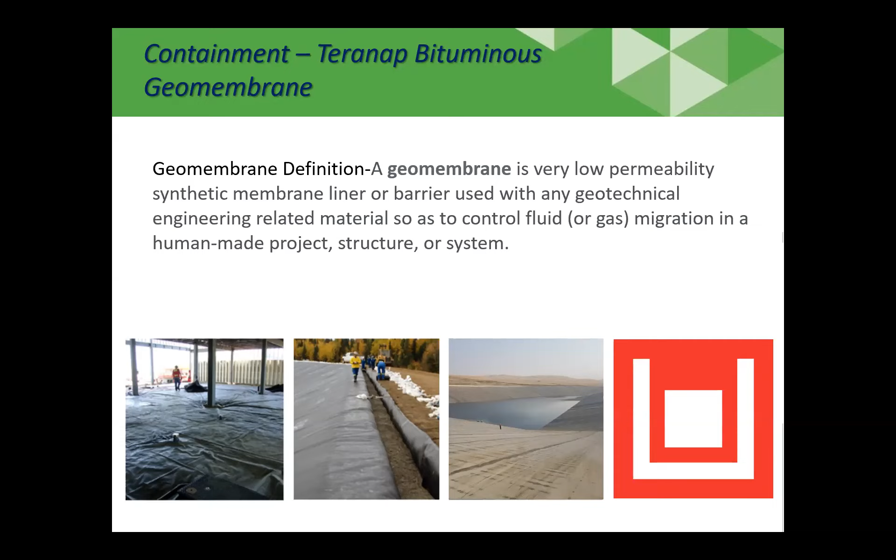Lastly, what we'll mention, and we'll go through this, Frederick will take us through this in detail, and he's going to share his screen for the technical part of this presentation. But when we consider the reasons that people are switching to BGM and specifically to TERANAP, there's really four reasons.

One is the conversion from conventional methods. The other is the cost effectiveness, whether it's from installation or whether it's from less maintenance and longer durability. It also goes hand in hand with a technical certainty. And then there are environmental benefits and construction efficiency.

The product is very easy to lay down and install compared to many of our other products. For many of the people that are joining us, as you know, dealing with the environmental conditions we have here, things like winter installation or wet installation, we believe that this product has a significant technical advantage versus a number of other incumbent products.

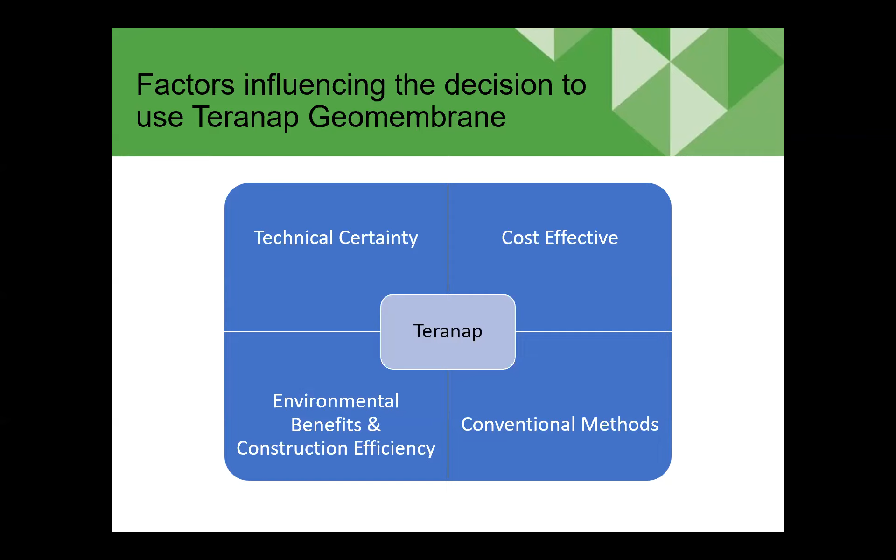So there's a couple of technical experts that you're going to hear much more about today. There are two. One is Frédéric de Martini, the Export Sales Development Manager for TERANAP. I had an opportunity to meet Frederick at their plant in France, and Frederick has traveled over to Canada a number of times, and he's got a personal connection to Canada as well. Frederick's got 20 years experience with TERANAP and has shown some very strong case studies to us around projects that they've done around the world, both converting to TERANAP as well as the longevity of the projects.

Second is Khaled Hosso, who is our operations manager for our installation services. Khaled comes with 19 years of construction experience and experience with all types of different geomembrane materials. Khaled is our most senior person that is on site managing our crews day in, day out, as well as our project management teams for NILEX. So this is the last part of the NILEX team where beyond going for the design and the supply, we go all the way to the installation.

Khaled will talk about some of the installation techniques of the BGM. So with that, Frederick, I'll ask you to share your screen and you can kick off your portion of the presentation, please.

Penelope, you want to start? Yes, okay, thank you. Hi everybody, I'm Penelope. I'm working with Frédéric at BMI in France. So I'm quickly introducing the group just for you to understand better the scope.

Please, Frédéric, the next slide. Just to give you some key figures about BMI: the number of square meters we sold, the fact that we have numerous manufacturing sites all over the world. We also have R&D facilities, and academies where we provide training. We are around 10,000 people, working in countries where we are properly established with headquarters, and also with many other countries through the export department.

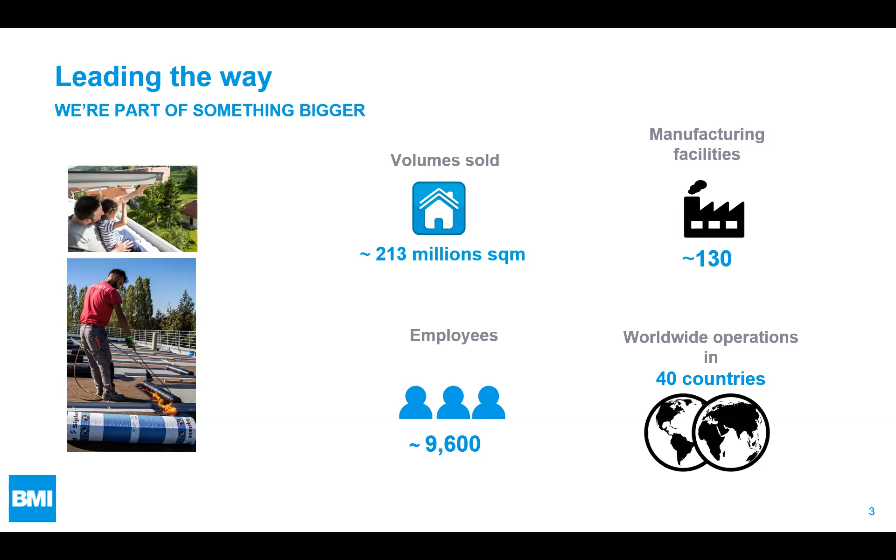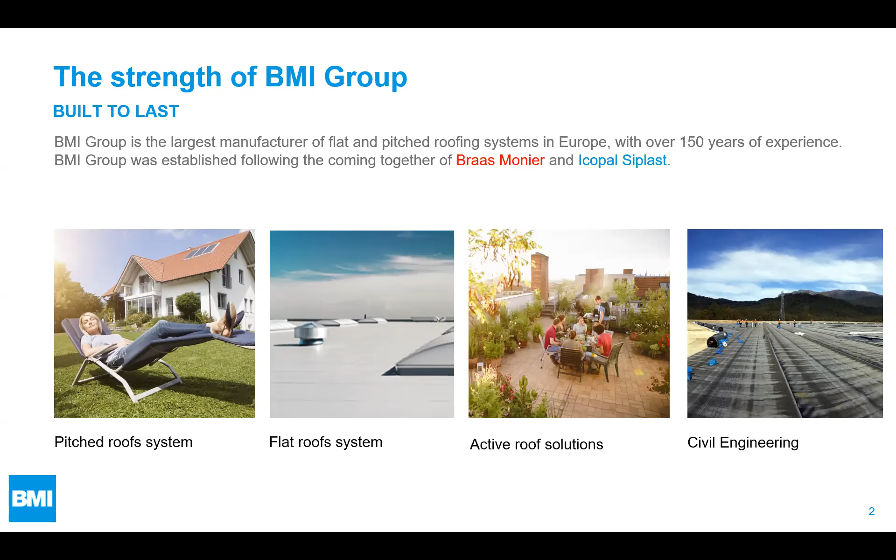Next one, please. So basically, BMI is the coming together of two different activities: Braas Monier, which is the pitch roof part with all the roof tiles and roofing components, and then Icopal and Siplast, which is more the flat roof and waterproofing, with all the flat roofs, the active roof - more the blue roof, green roof - and the civil engineering, where we are today talking about the TERANAP system.

So Standard Industries is the parent company. On one side you have GAF, dealing with North America, and within is Siplast US. On the other side we have BMI, in Europe. Inside BMI you have different brands such as Siplast, Cobert, Icopal, etc. Today the TERANAP, the name of the range, the geomembrane, is part of Siplast.

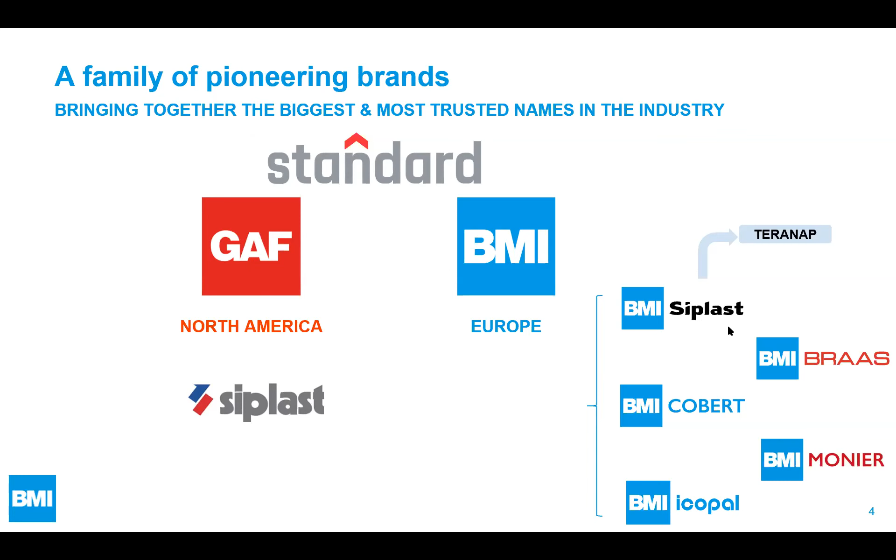Okay, thanks, and I hand over to Frédéric.

Good morning everybody, my name is Frédéric de Martini. Thanks Trevor for the introduction. Please don't complain about the accent, because everybody knows Canada is a bilingual country, so if you complain I'm going to talk French, and then you cannot say you don't understand it. I know it's a terrible joke, I do it all the time. Nobody laughs, but I like to do it.

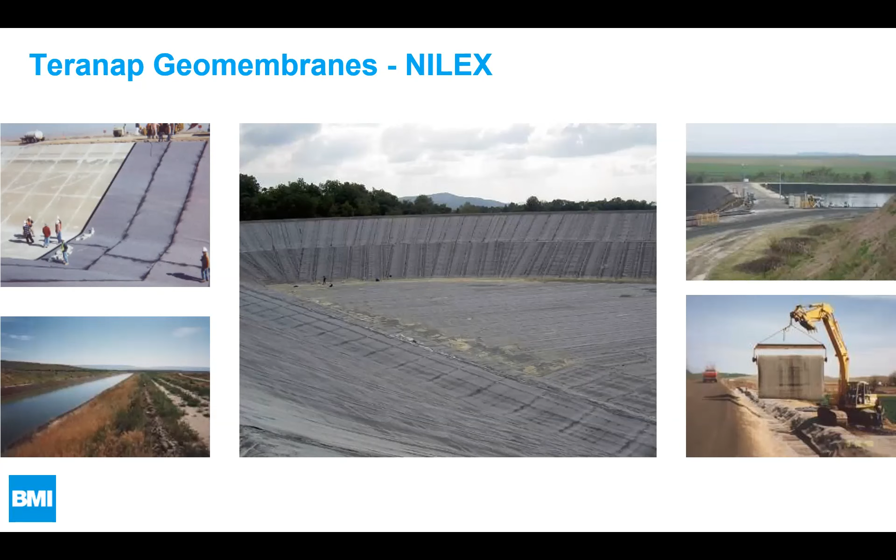So let's talk about bituminous geomembrane. I'm sure most of you know about HDPE. If we had to talk about the two main differences between HDPE and BGM, bituminous geomembrane: first is the thickness. It's so much thicker - we'll show it in detail later, but we're talking about membranes which can go from 3 to almost 6 millimeters thickness. And you can see here in the middle you have a reinforcement which gives the power of the membrane.

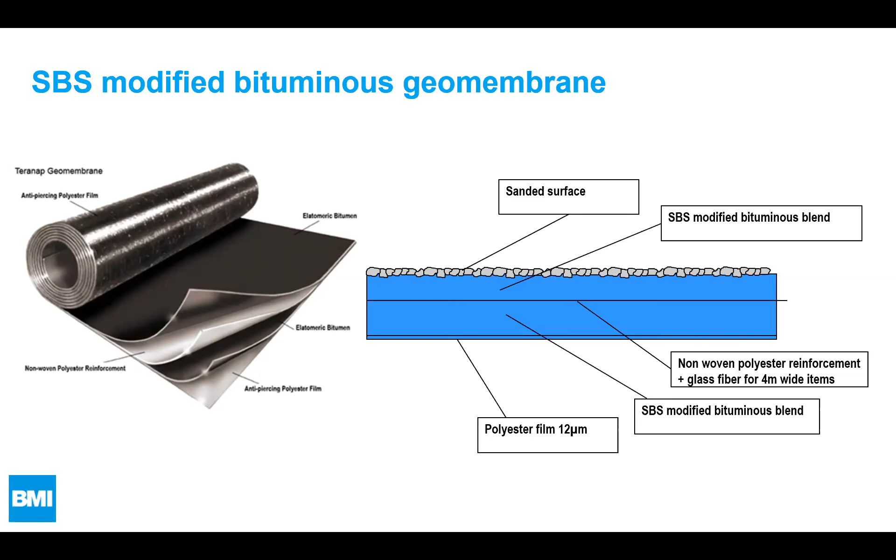The reinforcements have different functions - mechanical performances, tensile stress, static puncture, dynamic puncture, and tear resistance. Without it, it would not work. So we need to add it, and it's a very important point for our production process, and it allows us to manufacture it. If not, we could not do it. And we can store it a very long time and move it in the field and even in the factory.

It's important to say that this type of production, the bituminous membranes themselves, they come from the roofing industry. It started in the 50s with roofing, and then a fantastic guy in our company in 1974 decided to try it with large width, and at the beginning it was in France to respond to the water industry in France, for canals mostly, and of course the installation - it's very easy to install and to weld.

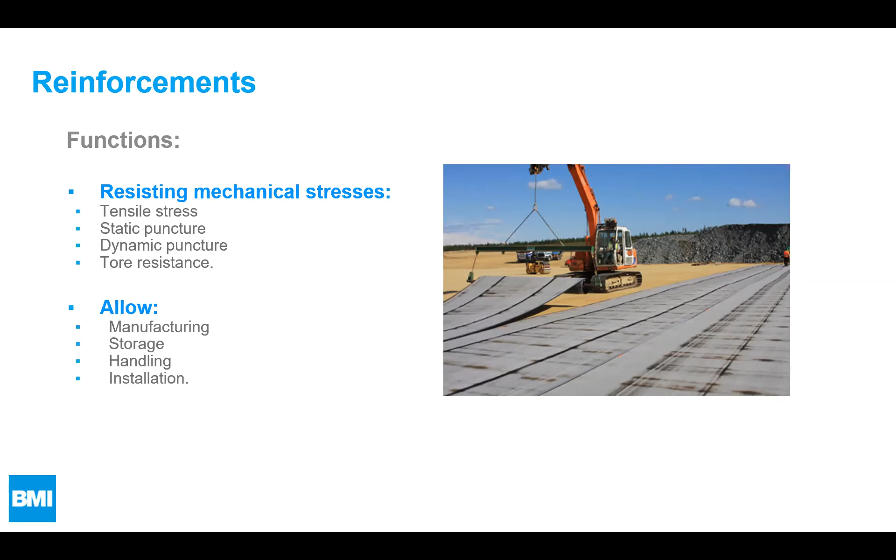So for you to know, there are mostly two types of reinforcements in the middle: glass fiber and polyester. What gives the stability is the glass fiber - it doesn't move a lot, so it gives that stability we want, but it's not very good for puncturing, so it could be a problem in our big jobs. That's the reason why we produce it with two reinforcements in the middle: glass fiber and polyester, which gives the puncturing resistance we need. We also need the membrane to be resistant and flexible at the same time - it's hard to have both, but with those two reinforcements we can achieve it.

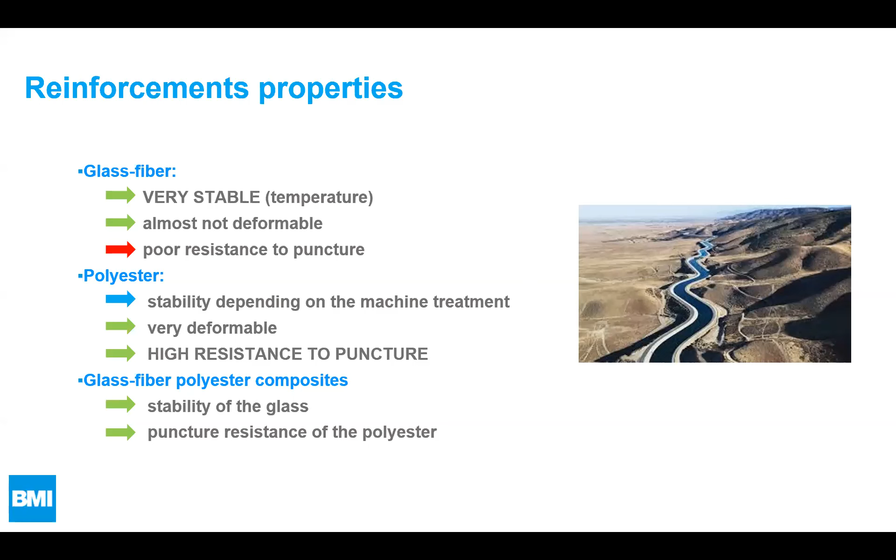It was for you to understand, but we're talking about a geomembrane. But different from, I think most of you know, let's say HDPE or PVC or EPDM, but they are the same fields of use, more or less. Mining wastes, we work a lot in mining wastes, mostly South America, but also Australia, Africa.

So it's interesting because we can have many different experiences with different kinds of metal, gold and copper and lithium, and different kinds of subgrade too. Also, we do a lot of hydraulic jobs, the water industry. Water industry can be canals, but also dams, electrical dams, or dams for potable water. It's never the same, and this is what makes that job very interesting.

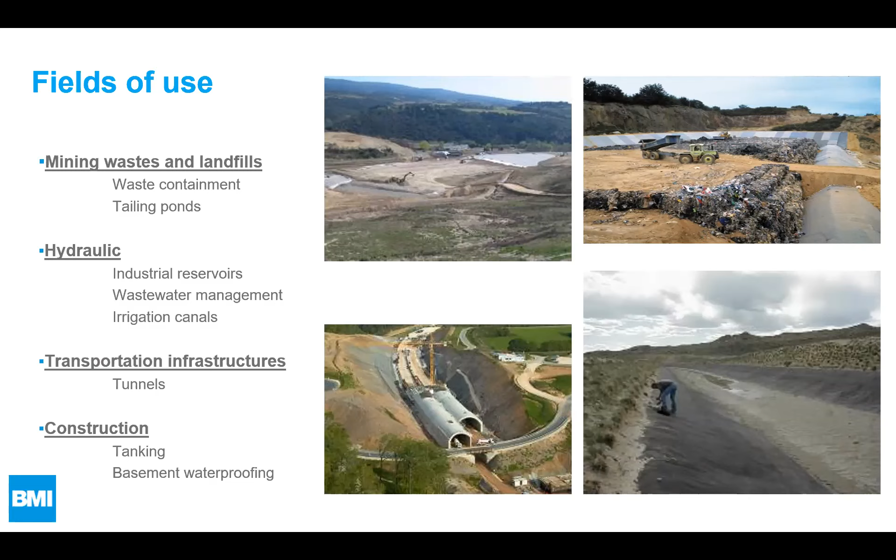We can also use that membrane for transportation, tunnels, but also bridges, and also for construction, for tanking. When we build a building near the sea, if we have a basement, then obviously we need to protect the concrete.

I'm sure we have a lot of HDPE lovers here. So it's not a presentation against it. We don't have anything against it, but we are trying to explain what we think is better. Why do we think that BGM has better behaviors than the other ones? So first is the flexibility.

It's a product which, as it comes from bitumen, is very flexible. During the job itself, if you have special geometric shapes, it's very easy to adapt. But also the flexibility is about low temperatures, and you know what I'm talking about. Being Canadian citizens, you know what low temperature is.

Just a personal parenthesis, as Trevor said, I have personal connections with Canada. It's absolutely true because my wife is Canadian, so I know what Canada is. I didn't know what minus 27 was.

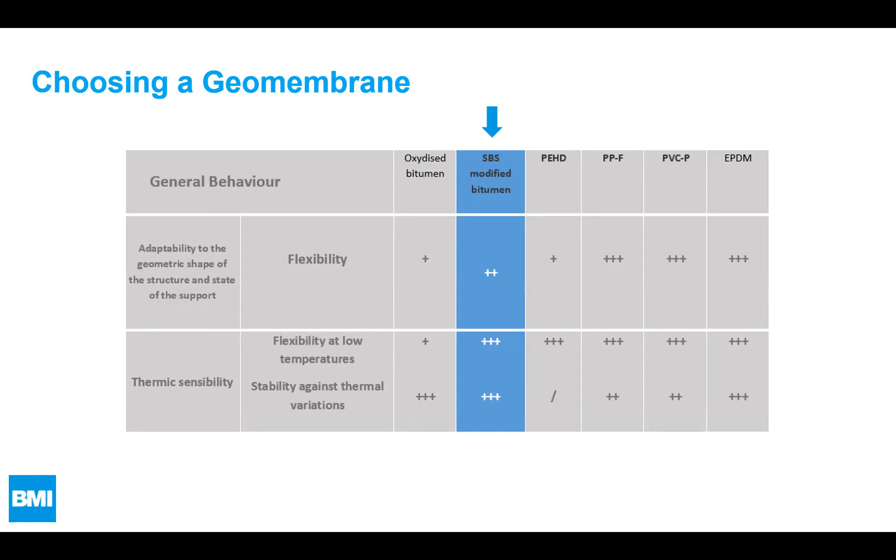And it's very important for us to try to demonstrate that with the experience we have, as I said, the membrane is 46 years old. So we have enough experience to say, okay, we can do that with BGM or not. Sometimes it doesn't work.

So the behavior, it's very easy to weld. We are working with Nilex, for example, with a very revolutionary system to weld the membranes between themselves with air and not with a burner, which is a different kind of burner. So it's always a work in progress too.

But anyway, it's very easy to connect with a 20 centimeter overlap. And because I know we'll have the question, we also have a possibility to test the overlaps. It was not possible until now, but we have great engineers in our group, and they found a solution to test the overlaps.

Then connections, concrete, for example, it's very easy with a primer first. You have to do a priming of the concrete, and then you can weld it perfectly. And that experience also comes from the roofing industry. We did very complicated roofs, and we also had to deal with concrete. So we know what we talk about, and all the connections are easy with BGM.

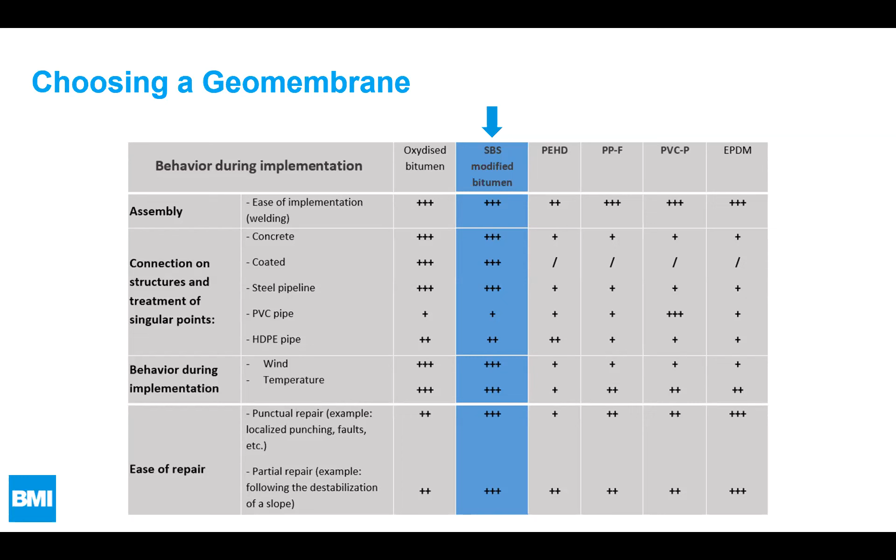Well, aging is the key. When a product is new, every product is fantastic. But then how much time is it going to last? So as I said, with the experience we have, it's easier for us to demonstrate what we did, and I will talk about it in detail later.

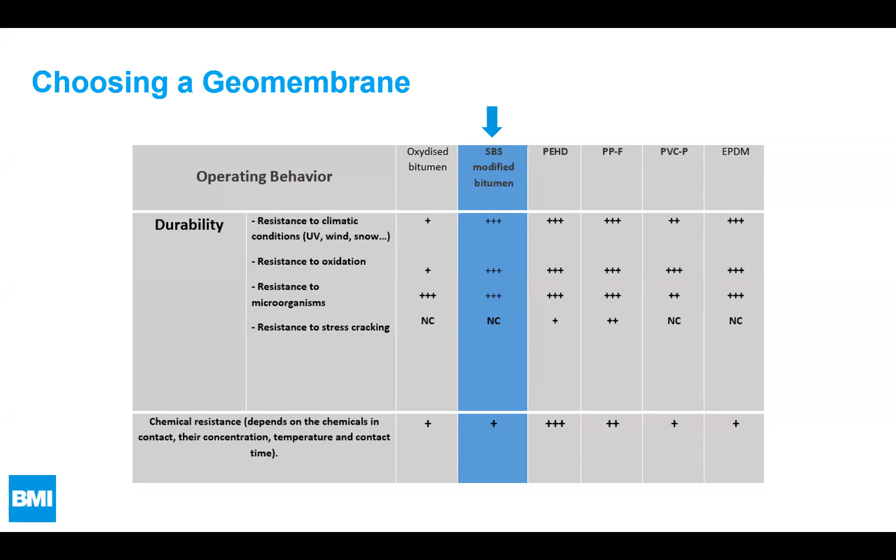Chemical resistance, the same thing. This is maybe where, to be absolutely honest, we are maybe not better. For example, hydrocarbons: our TERANAP doesn't really like them, so we have to work on it. But mostly, when we talk about mining, cyanide and everything, knowing the concentration and temperature, we can give you a report and prove that it's going to last. For example, the cyanide is not going to attack the TERANAP.

Sometimes it's elastic, sometimes it's elastical, sometimes it's magical. I'm sorry about the struggle with English.

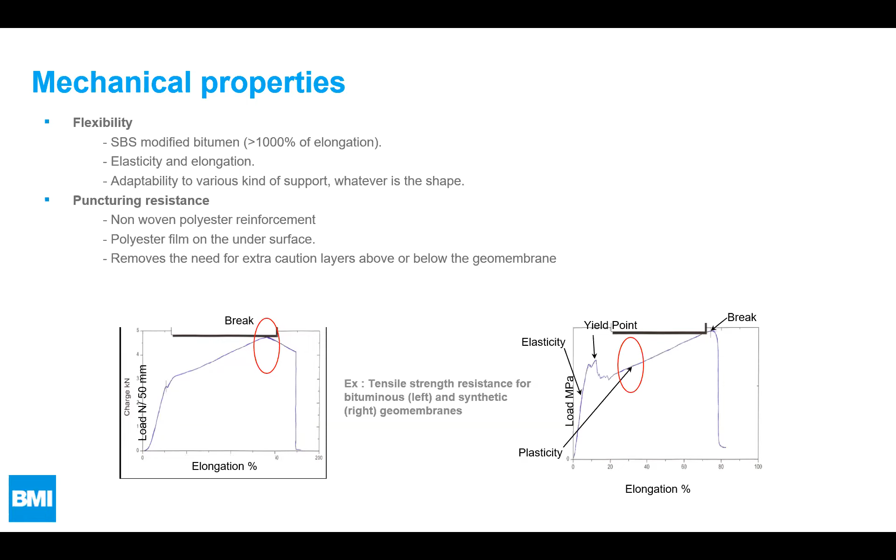But on the right, you can see that you have the same kind of elongation with HDPE, but around 18% you're going to find what we call the yield point. The red circle is not in the right position here; it should be at the yield point. From 0 to 18 it's going to stay elastic, and then the HDPE is not going to come back to its former shape, it's going to stay plastic. So it's a very, very important difference between the two.

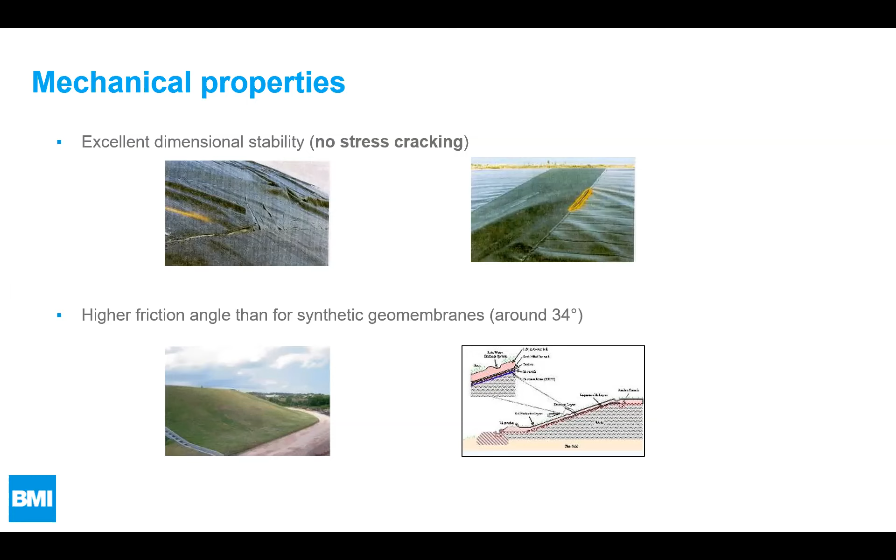What I mean is that if you unroll an HDPE membrane, for example, and you have the sun on it, you're going to have those waves, and you have to wait for the weather to be better before you can install. With the BGM, you don't have those problems. You don't waste that time. Another big advantage is the friction angle, which is around 34 degrees. So it can make the general contractor a big saving of money, talking about an embankment.

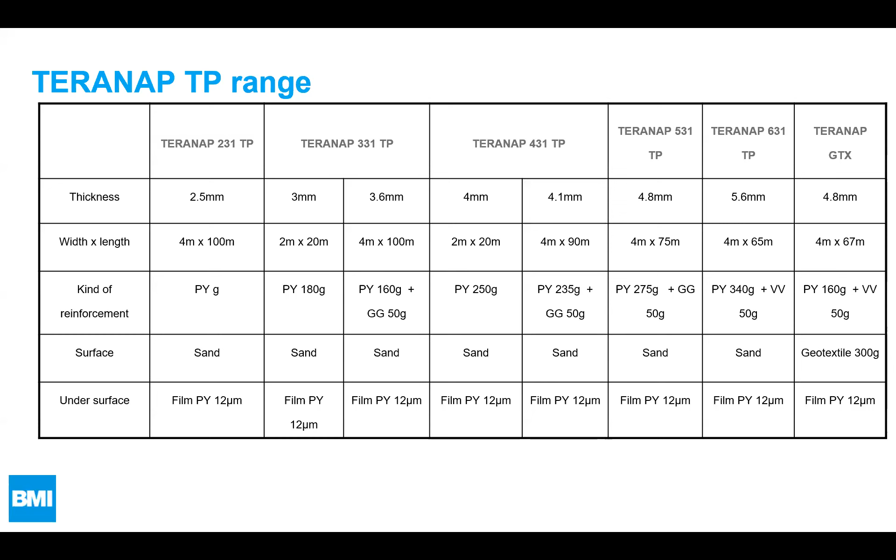We can also produce in 1 meter for some details, but normally it's 2 meters or 4 meters width. And we can also do it if it's an important project, talking about quantities. We had a job in Lebanon last year, a dam, and we made the length that the job needed. Here you can see it's 100 meters or 90 or 75, but if the job needed 82 or whatever, we could do it. It's not an issue. We can do it tailor-made.

So what is important is the aging. When this product is new, it is great, and then what's going to happen in 15, 20, 30 years? There are solutions to do it in the laboratory, but it's always very theoretical. So this is an example of a job that my friend Trevor, who is listening, from Siplast USA, did in '91. It is a canal in Casper Alcova in the USA, and 25 years after, they went back on site and took real samples to see.

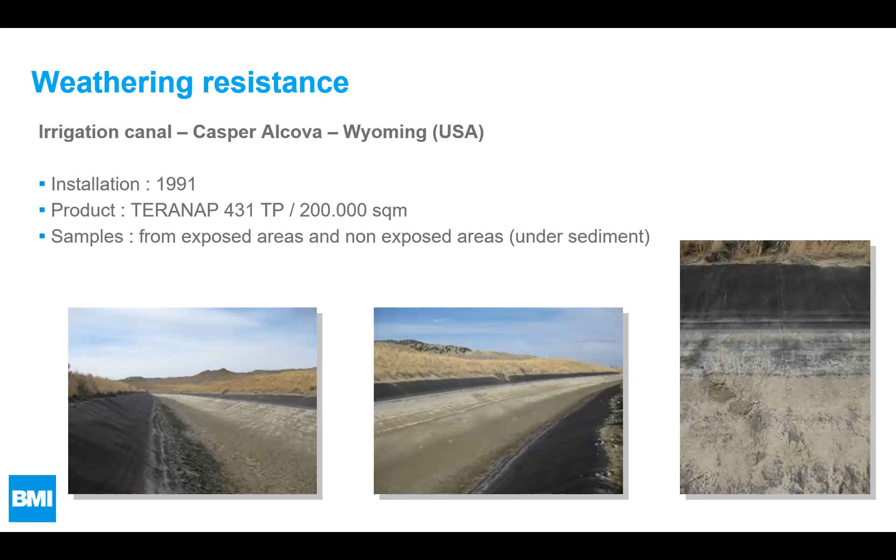Well, it was an external laboratory, of course, and they took samples from areas exposed to the sun and non-exposed areas to do tests and to see what happened after all those years. So this is very interesting. And to make a long story short, you can see that there are like 3 points.

Let's say average peak load would be the quantity of material that was lost in the process. So the reinforcement, as I talked about at the beginning, is in the middle, and you can imagine that to reach the reinforcement, we will need years and years and years. So the material just lost a few and nothing. But there is no difference between the exposed and the unexposed parts.

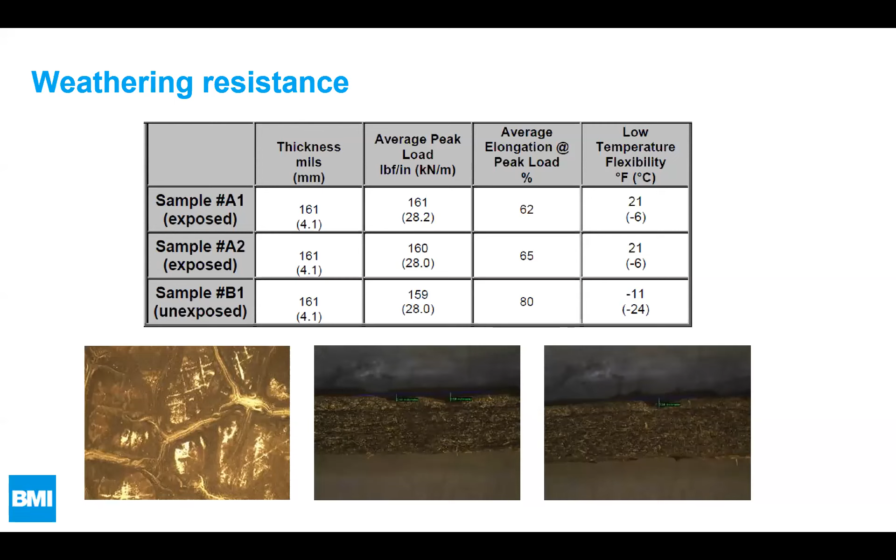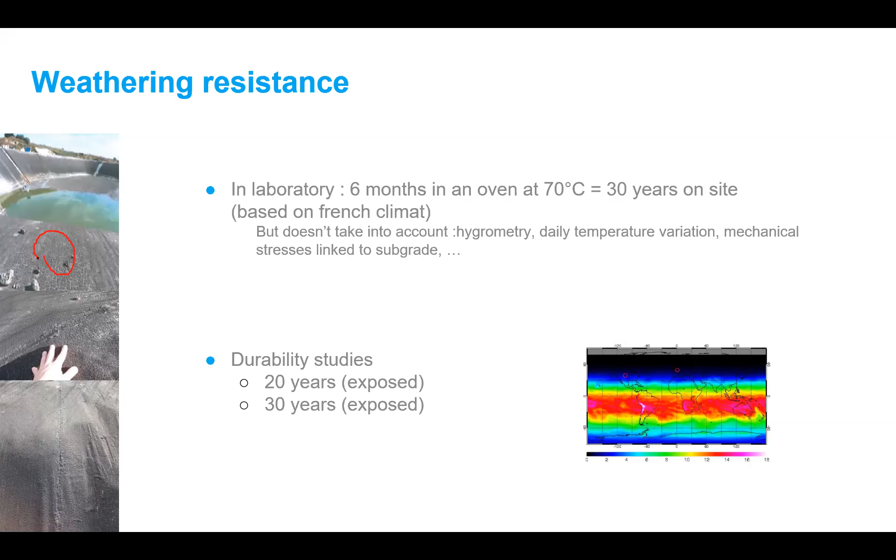We can see that in the unexposed sample, we've got still minus 24 Celsius low temperature flexibility, which is like a new product. And we just have -6, but you know, after all those years, it's very good performance. So what the lab concluded is, if I come back here, for example, if you see on the left, can I point it? Yes. Here you can see those little, like, crocodile effect, let's say. It's nothing, and it doesn't affect the performance of the membrane. Those cracks are just aesthetical.

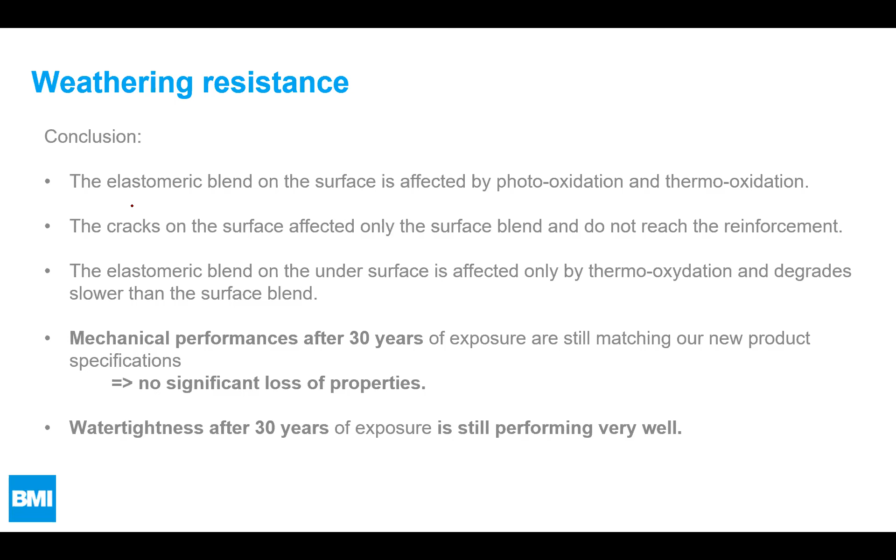Then the mechanical performances still remain fantastic after all those years, and so the water tightness, which is the capacity to waterproof, is still performing very well after 30 years. So this is the question when we're talking about guarantee or warranty, what can we give? So this is also a very, very important point. So what are our strengths? This is the unique BGM with 46 years of experience.

To be absolutely transparent, there is another BGM producer, which is also French. So we are the unique BGM producer with 46 years of experience. When I wrote here perfect control of our manufacturing process, it seems obvious, okay? But can you imagine, in a geomembrane of 400 square meters, how can you say you have 4.10 millimeters everywhere? So this is what we can do. Once again, thanks to our experience, we have the same thickness all along, if you see what I mean.

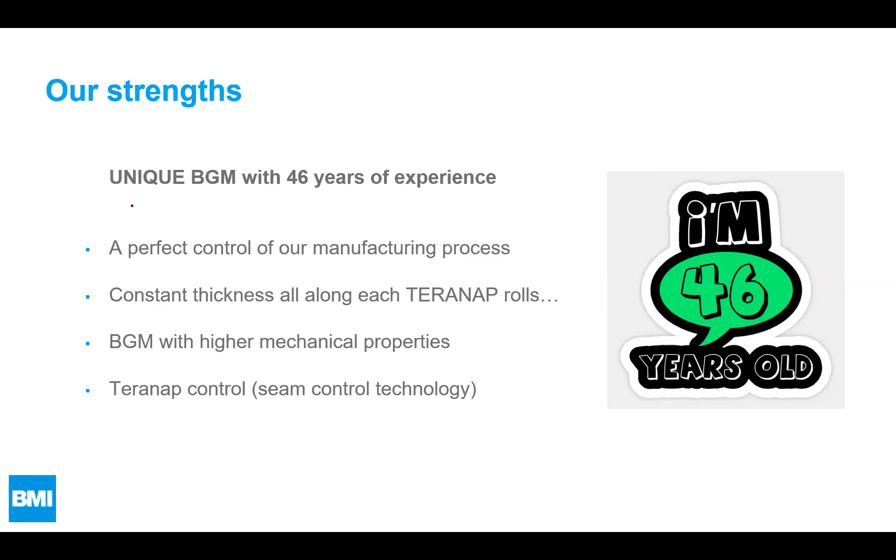The BGM with higher mechanical properties, sometimes it's true, sometimes it's not. For those who would be interested, I could send, or Nilex obviously could send, comparisons of it. But in most of the cases, we've got the best technical properties. And we have the TERANAP control. We can do a control of the seams by a new technology, and believe me, we are the only ones able to do that. We also have a certificate for potable water. So when we work for a dam or canal, it's absolutely mandatory.

As I said before, very high chemical resistance, and we saw one example of a real test we did to demonstrate the resistance to aging. But if you needed more experiences about it in other kinds of jobs, we have them. And obviously it's always done by external labs, so that we can prove it. So yeah, the mechanical performances are very high, for tensile, but also puncturing resistance. It's important to say that because I repeat myself saying it's easy to install.

Okay, it's not. I mean, you cannot become a BGM worker in one day, but this is where I think we are strong, because we have a training center in France. We have engineers and technicians who can assist if your customer needed it, and say, okay, fantastic, we have an installation company here, but where is the producer? The producer is not just a salesman. I can tell you, we are a real partner, and this is really where I think we make the difference, because we are involved in our projects.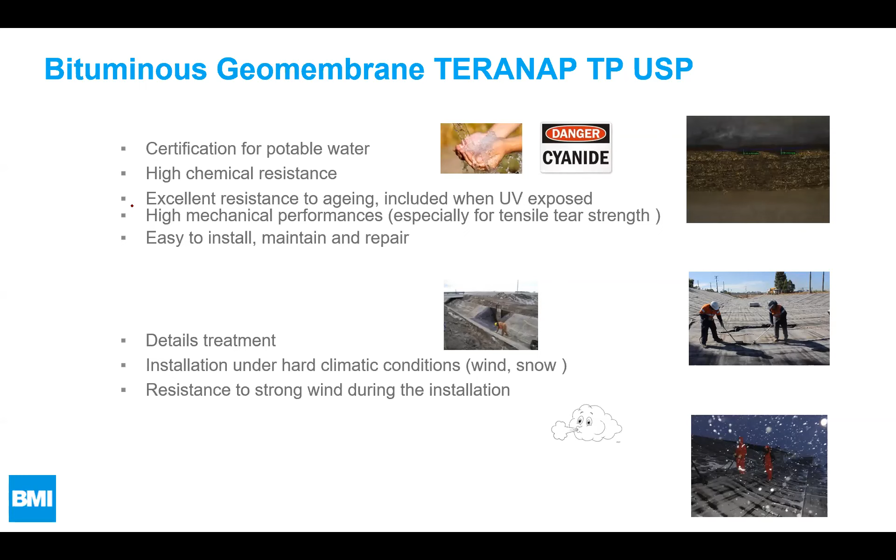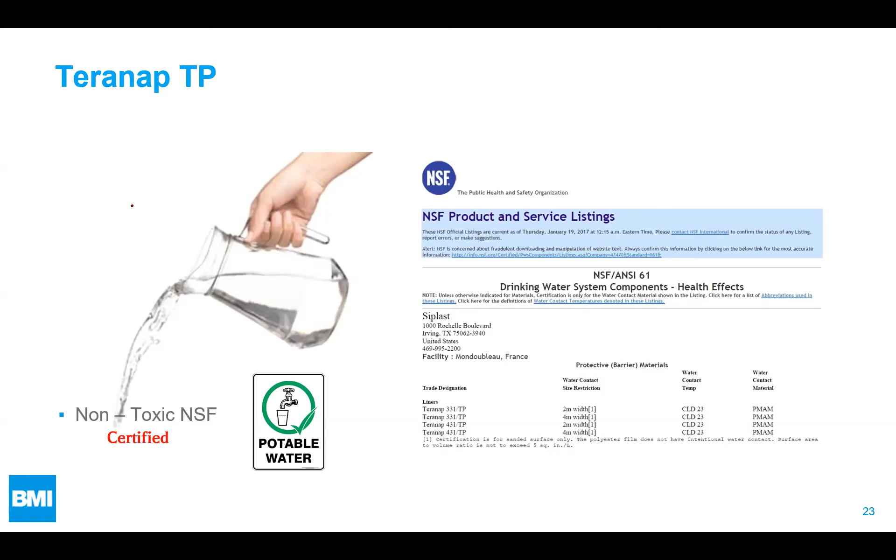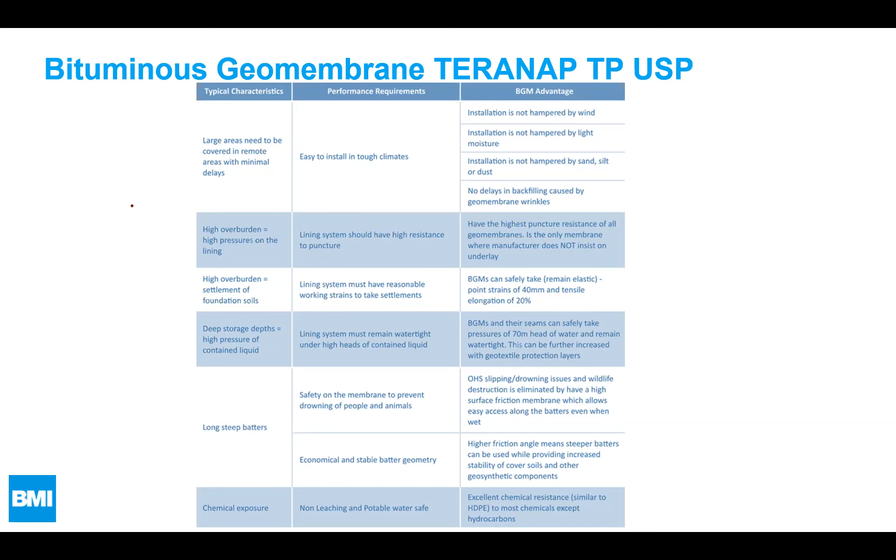Yeah, TERANAP has got that North American certificate for potable water. I don't know if I'm going to go through all those details, because it's a lot, I think. But yeah, I know that this presentation is recorded, but in every job we can show the differences and the advantages that the BGM has compared to other solutions. But I think it's a bit too much and a bit of a repetition to go through all the lines.

I don't know if you have an eye, you can see somebody very important in those pictures. On the right, upper right, you can see an important man torching. This man is Trevor from Nilex. So we can also make a CEO work hard. Can you imagine? Sorry for the bad joke again.

As Trevor said, last February he was in our factory just before the crisis. So fantastic. And I said to him, well, if you want to work with us, I'm sorry, you have to weld. So he did it very well, and you can see also our engineer Pierre helping and training him.

So those pictures here are not there by chance. They are selected because we want to be your experts. We want to show you that we know which kind of BGM to recommend and to specify. And also we certify the installers that work with us. Well, I have to say it's more for Canada. We know that the installers are good anyway, but in some other countries it's slightly different. So most of the time we need to train from scratch.

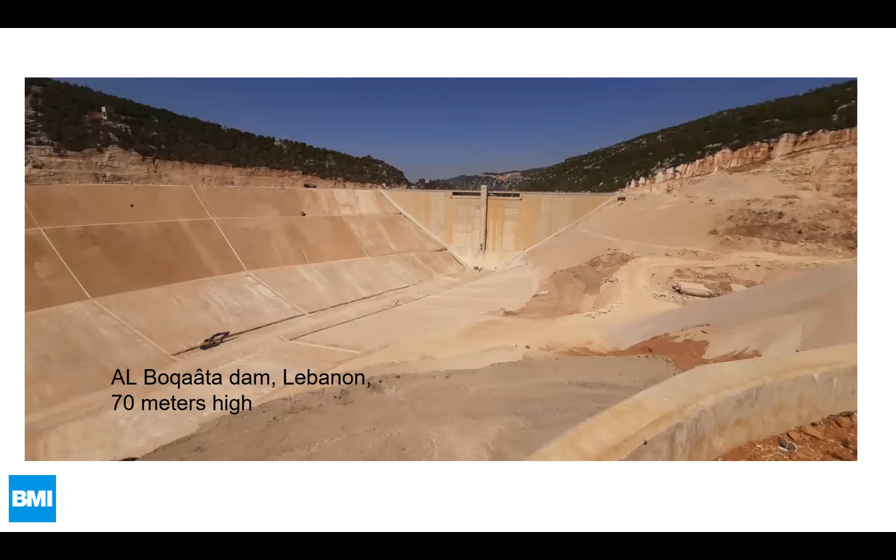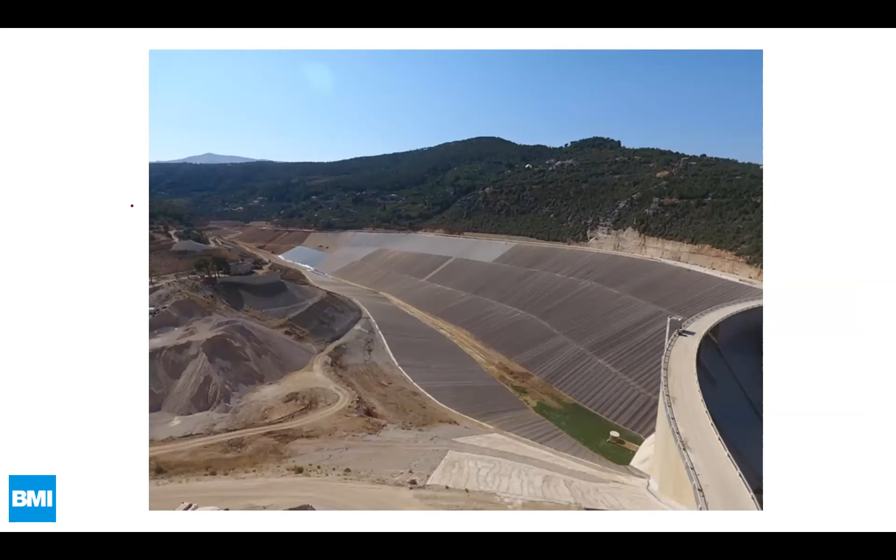This is the job before. I'm very proud of it. I'm sorry, but it's a big success. And the after, well, not the after, but it's the work in progress. It's not over. But this is an example of, I think, a great case study that, once again, all the details you want, all tests, reports, whatever, we'll do anything to send it to you.

Some successes in countries: South America, but also Australia, Canada, of course, and Africa. Graphite mining, lithium, copper, gold.

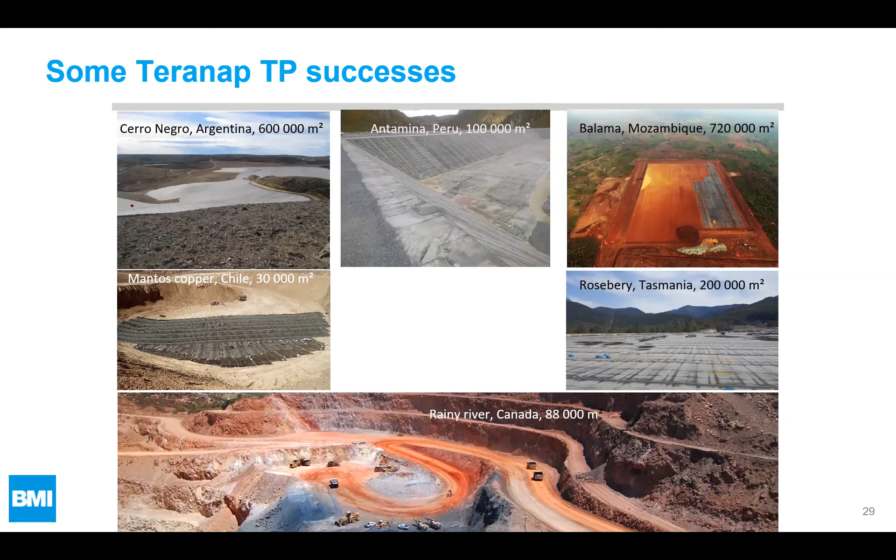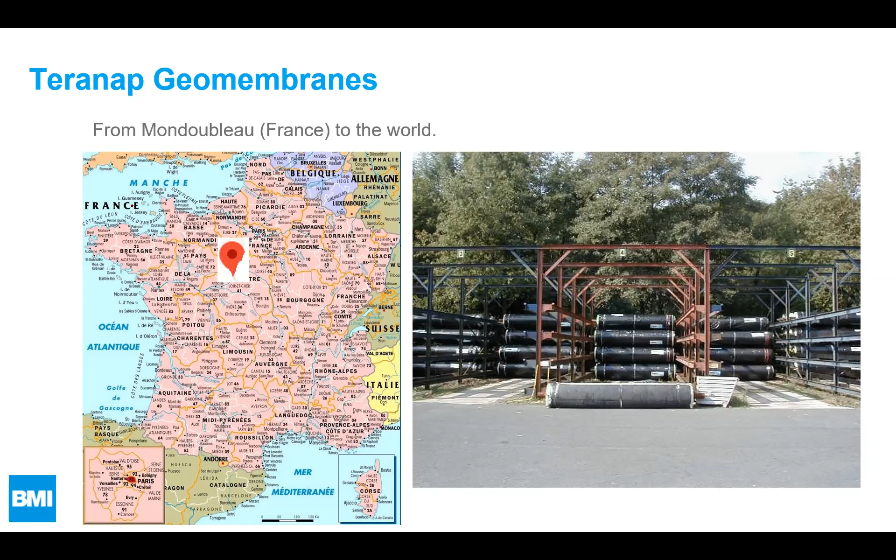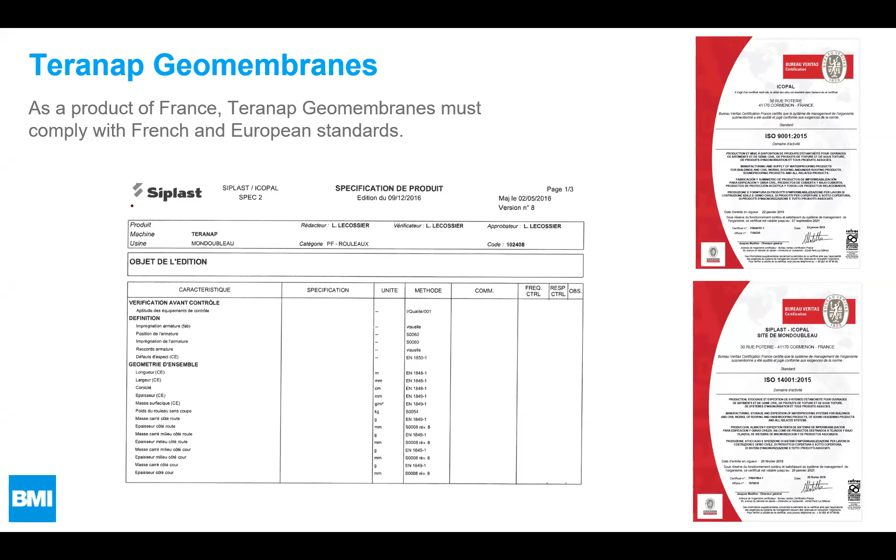Well, this is more for Europe here. All the standards and everything, but we also comply with ASTM standards. Everything is on our data sheets, obviously, which is an example here.

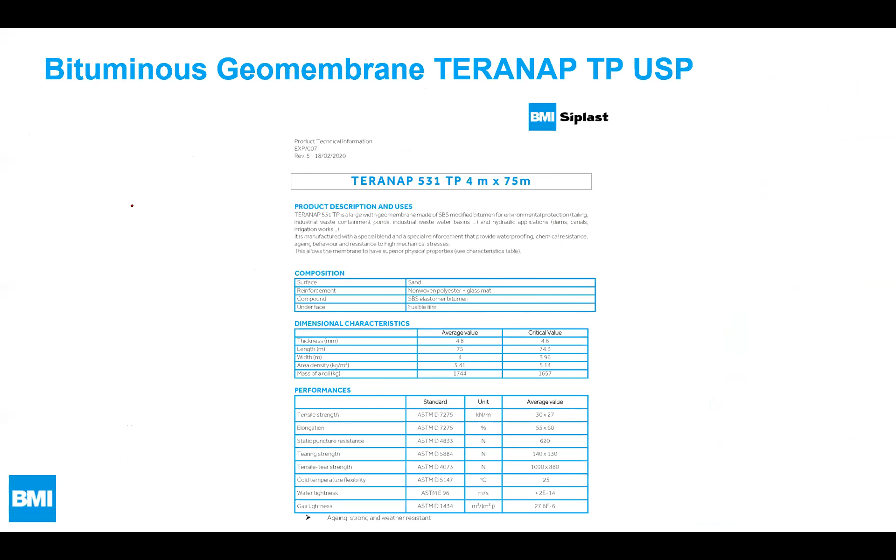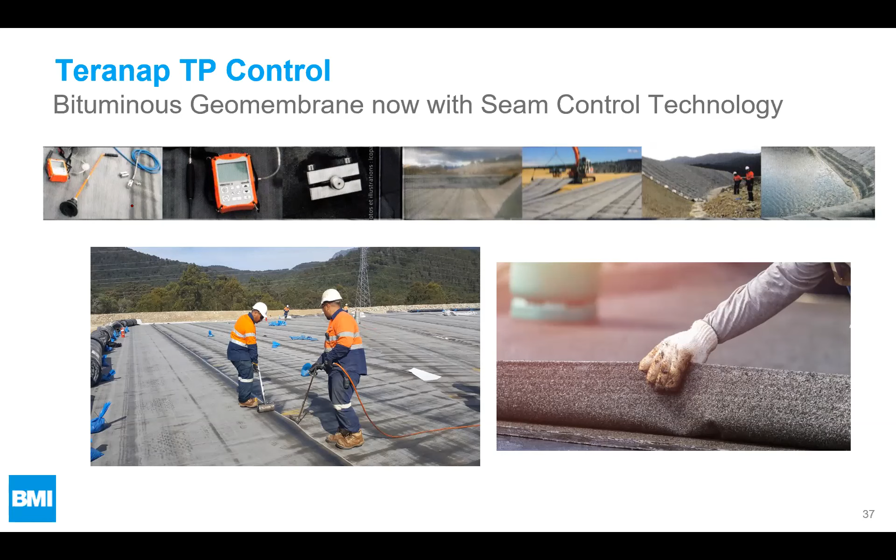And a few words about the seam control technology. We were always criticized because, well, besides your accent, it's all perfect, right? BGM is all perfect, but you don't have a seam control technology like HDPE. Okay, we're working on it, and our great technical export department invented it. So it's really the unique bitumen geomembrane with an integrated seam control.

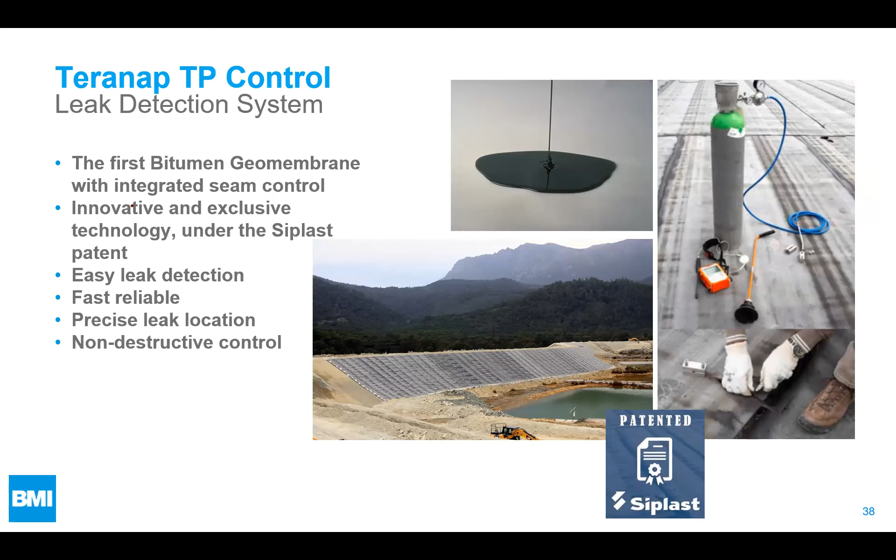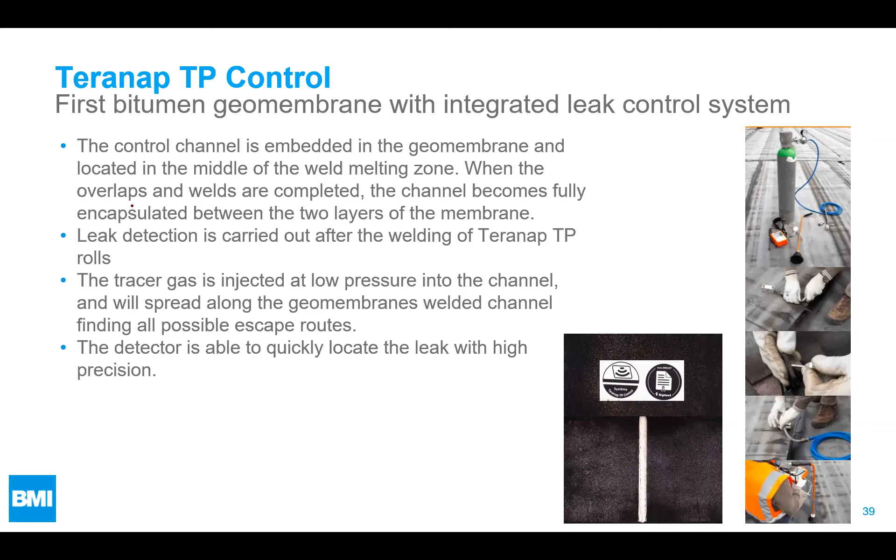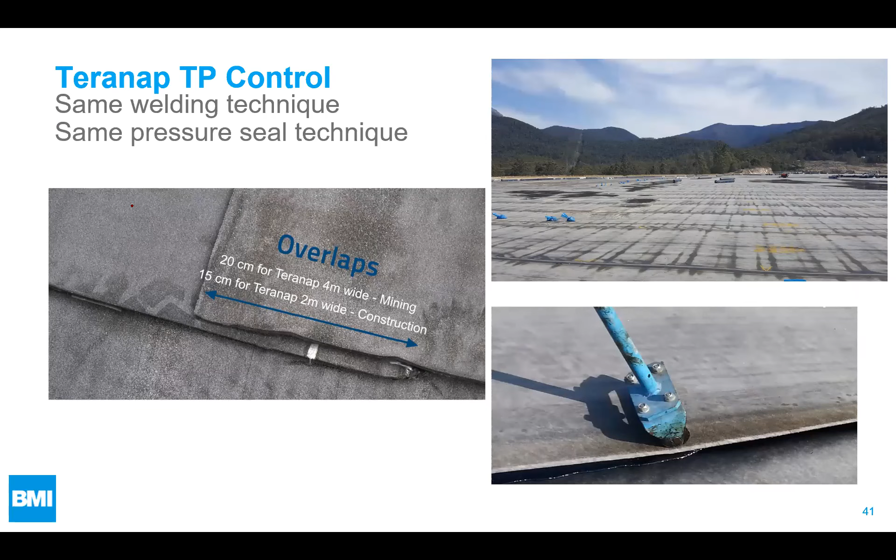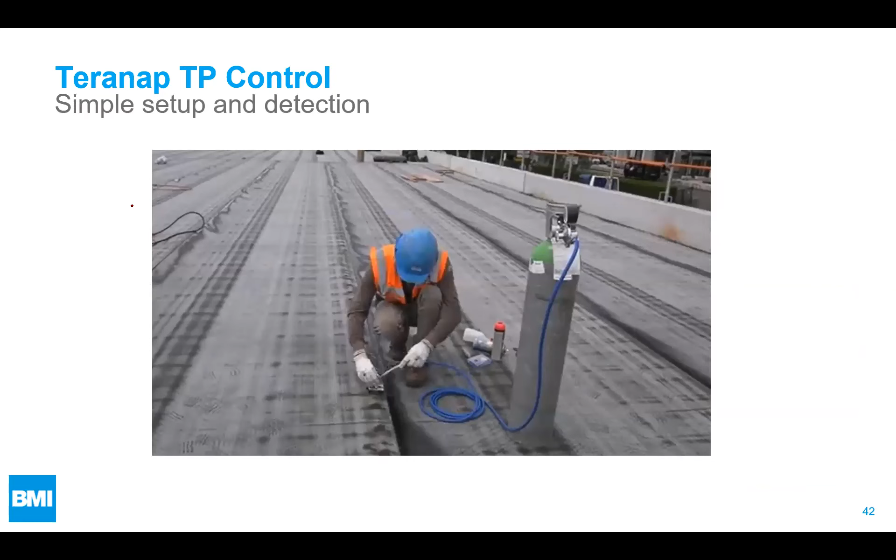Perfect. Good day, everyone. Thanks, Frederick and Anatolia, for the wealth of information. Frederick, I don't think you'll be the only guy with an accent in this presentation today. I loved your accent. Thank you. Thank you. I love you. Thanks a lot.

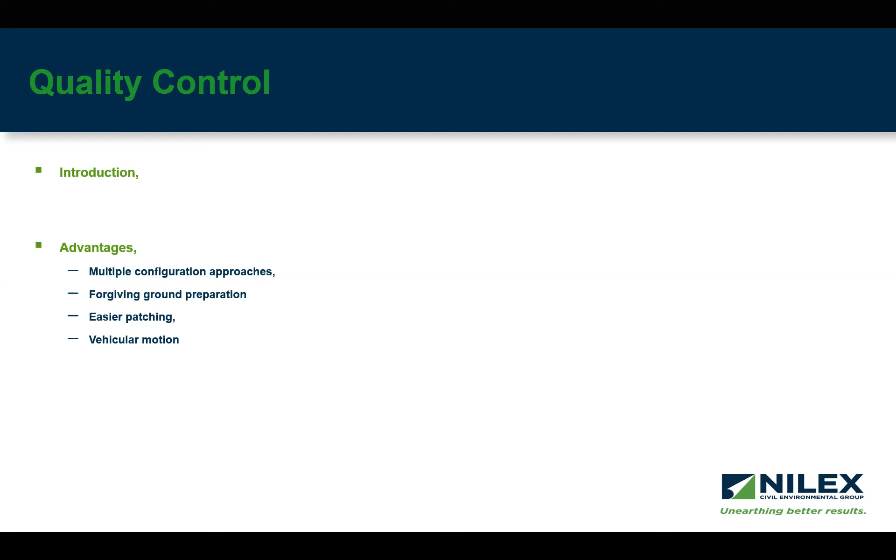Back to quality, where to start? First, understand the application - what are we doing? Accordingly, we can select the product, select the welding techniques, and a set of other tests.

Second, we need to communicate expectations and install methods best suited for this application. Third, we update our ITP and prepare the tools accordingly.

Then, before we arrive at site, we need to discuss some prerequisites - things that need to happen for a successful installation before we arrive.

First, the first activity is receiving material. The material has to be received in a certain way and stored in a certain way to ensure the integrity of the product. Subgrade preparation -

Nilex TERANAP is more forgiving in preparation than other geomembrane products. We have our preparation manual that will guide you through that.

Third thing that needs to happen is you need to dig the anchor trench before we arrive at site. We will discuss with you other termination methods, like concrete attachments or whatever termination is happening on site. Another thing we need to consider is the weather at the time of installation.

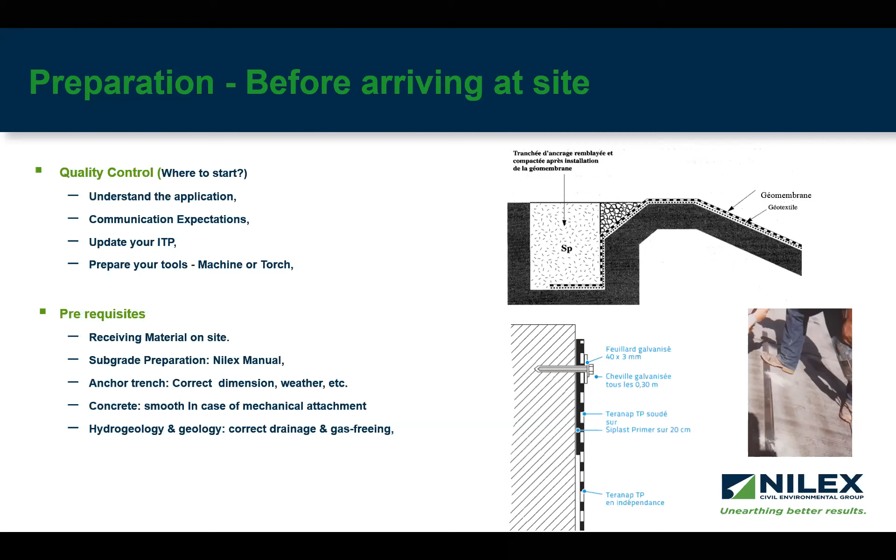You can see here the picture of the anchor trench after installation, and on the bottom you can see the mechanical attachment in case we are attaching to concrete.

This is a picture for the product arriving at site. In the bottom left corner, the middle one, this is the pole we use to offload the product.

As you see, the product needs to be stored on site supports. This can be steel, concrete, or wood blocks, as long as it can carry the weight of the roll.

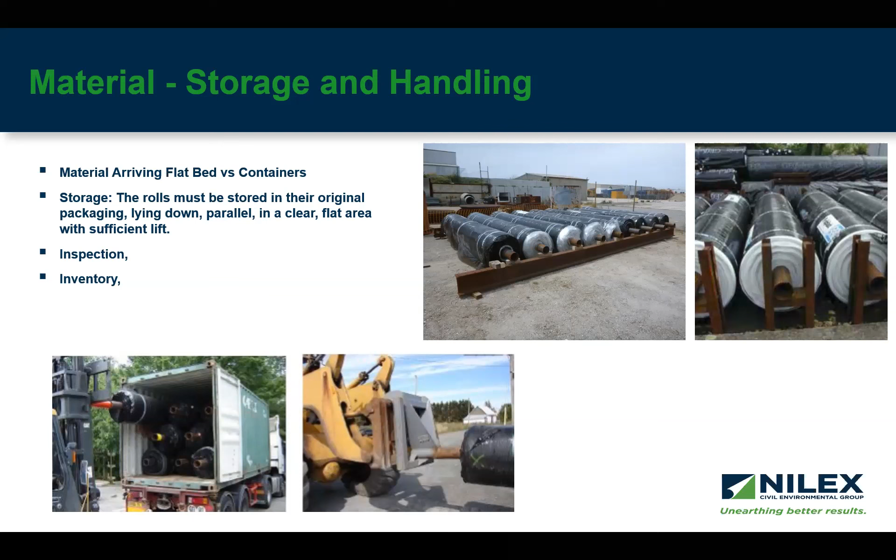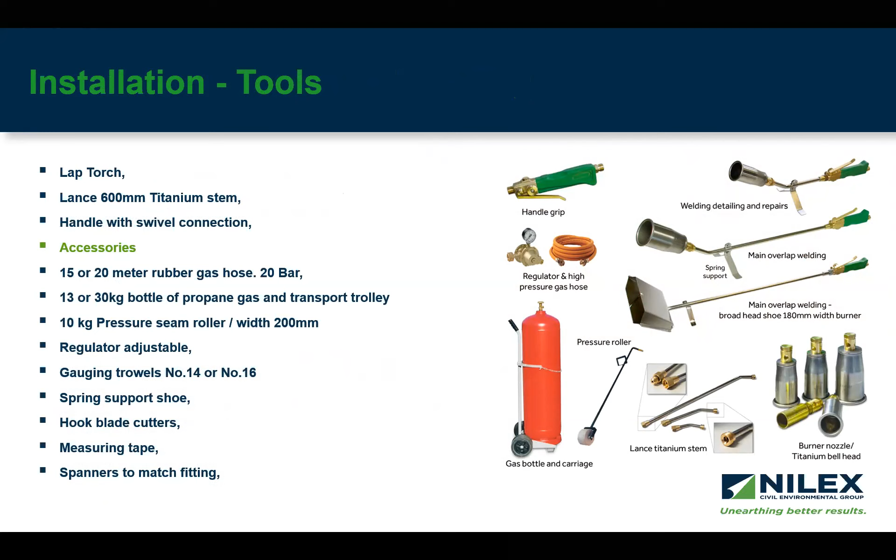Here are some pictures of the tools we use for installation - some basic tools, torches, air pressure, etc. That's why we say it's very easy to repair in case a hole accidentally happens on site.

Our biggest tool to install this product is our engineered spreader bar, and it comes with connections to be attached to different equipment on site.

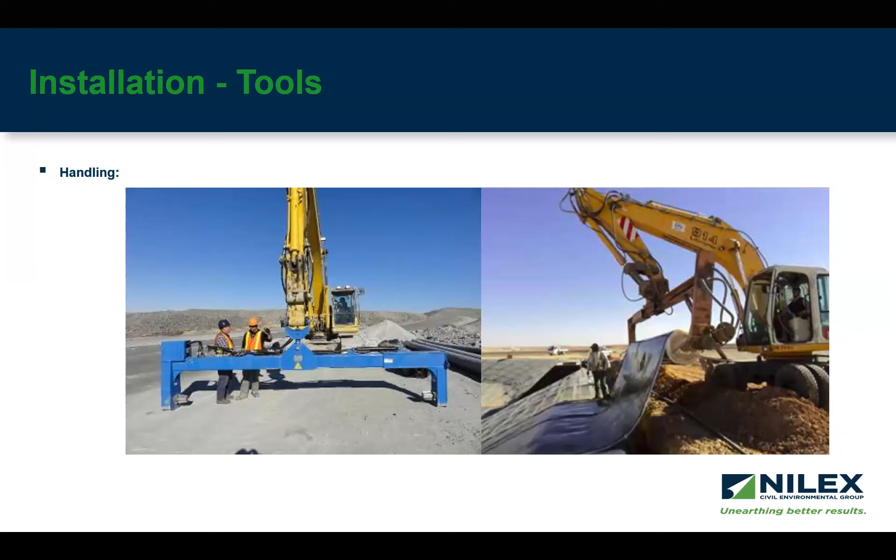Another handling equipment required on site - the most common one is using a hoe because it gives flexibility in movement in all directions. We can use other tools and machinery according to what is available on site.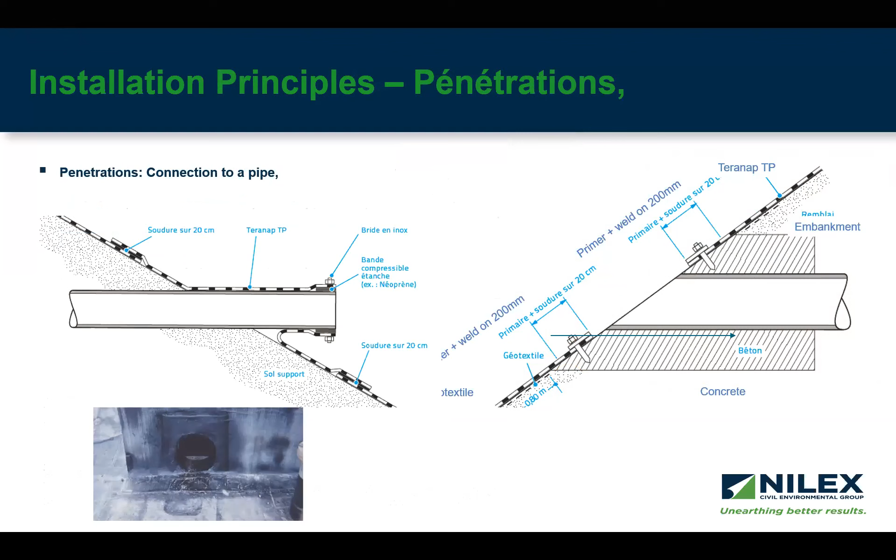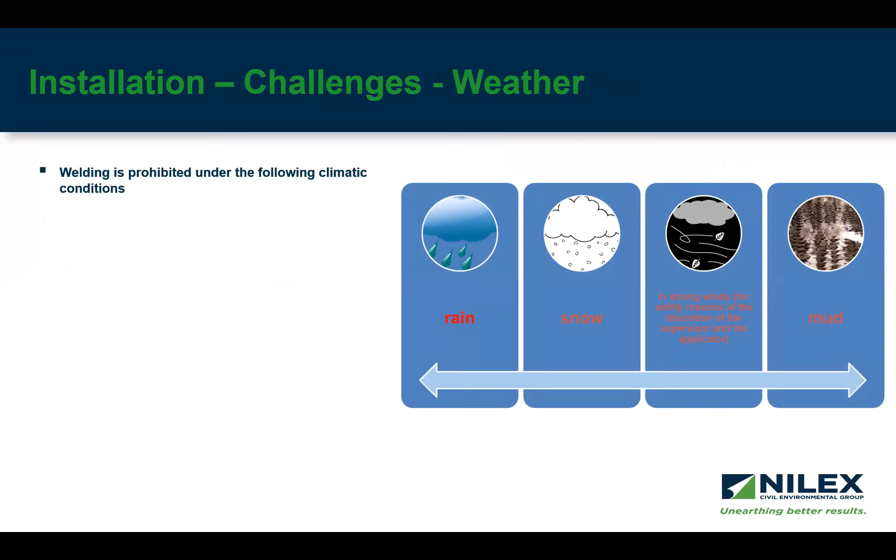One of the main challenges while doing installation is the weather. Again, it's worth mentioning weather still affects the installation of this product, but it's much more forgiving compared to other products, especially regarding its weight and wind effect. It's much less affected, as mentioned in the previous part of this presentation.

These are some pictures of installations happening in not-favorable weather conditions, but it's still not like a blank check. We will need to discuss and assess case-by-case basis so that we ensure a successful, high-quality install.

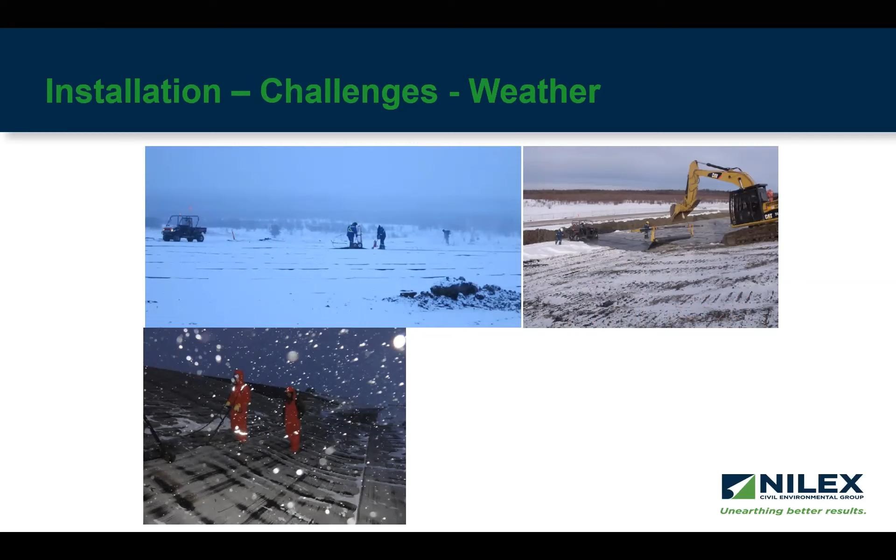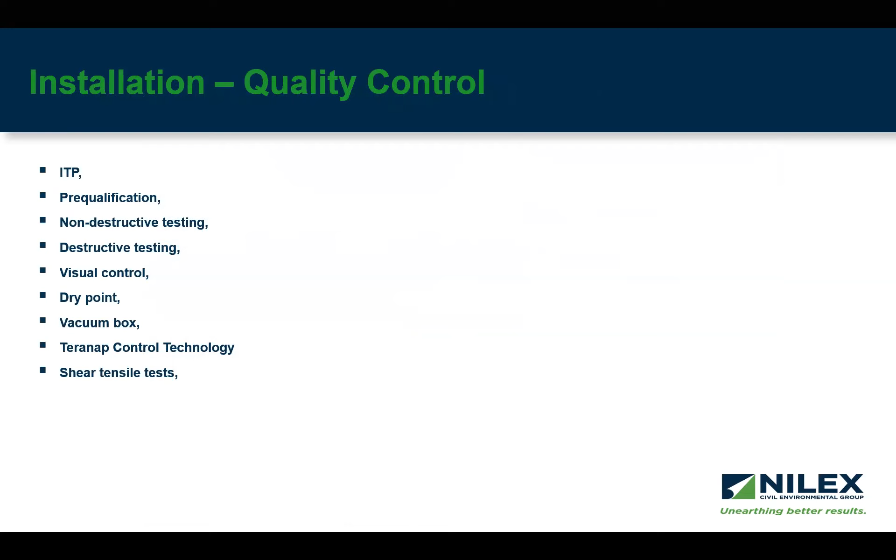Now, to the bottom of quality control, I'll go over some tests that are most commonly used. We start with the pre-qualification - the first test we do before installation.

We weld the test piece and then use a coupon cutter to cut the test samples to ensure they pass the parameters required. The picture on your left-hand side.

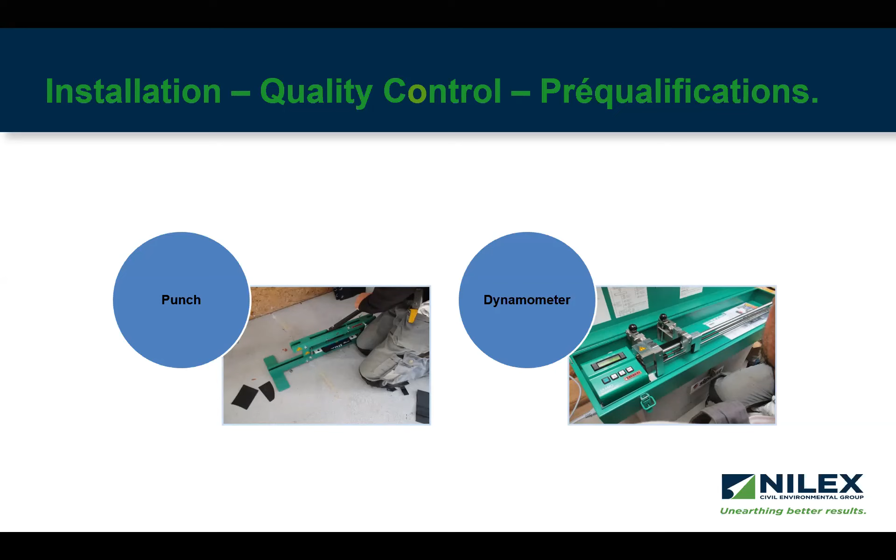Then after cutting the coupons, we use the dynamometer on the right-hand side to test them. The tensiometer acts as a verification of the testing method, whether we are using the wedge or the torch. We certify the tensiometer's cells yearly to ensure it's giving us proper parameters.

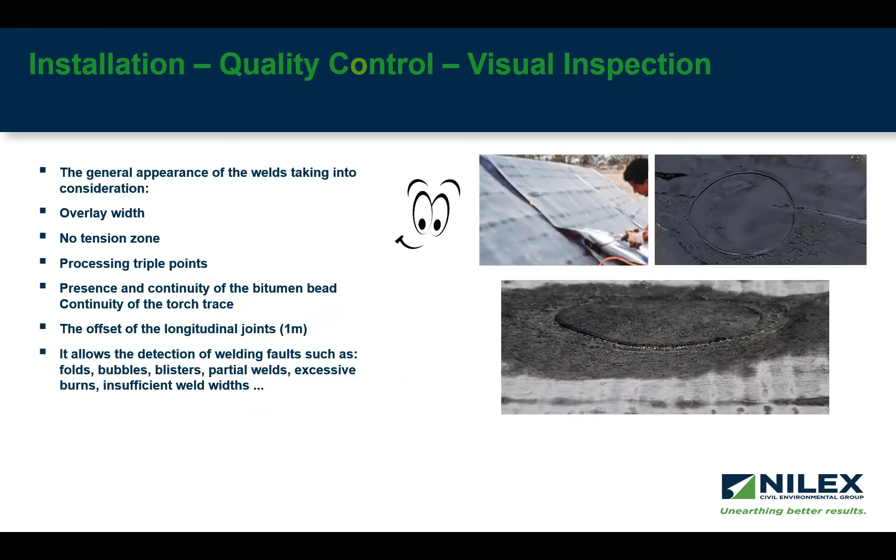Another very common test method is the visual inspection. In general, we are looking at anything that doesn't look okay - any fishtails, any overheating, underheating, anything that doesn't look fine - it's worth a zoom in, and accordingly we can apply the fix.

Another test is the non-destructive test, or air lance test - also the most common one used for this product. You will need a specific compressor with enough volume capacity for the test to be effective and successful. But after testing, this test can happen so fast and it really gives high assurance of the weld.

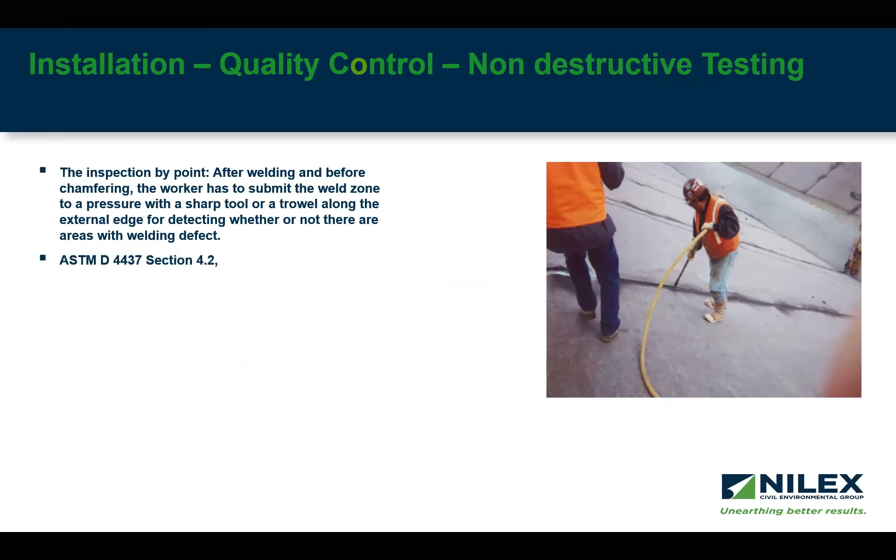Another test, also very common and used in other geomembranes, is the vac box test. We use the vac box to test any patches or specific portions of the seams as per specifications. Destructive testing is very similar to the pre-qualification. We do it every certain amount of meters to ensure we have the proper parameters after welding. You won't expect a lot from the peel test, but the shear test will be the most effective portion.

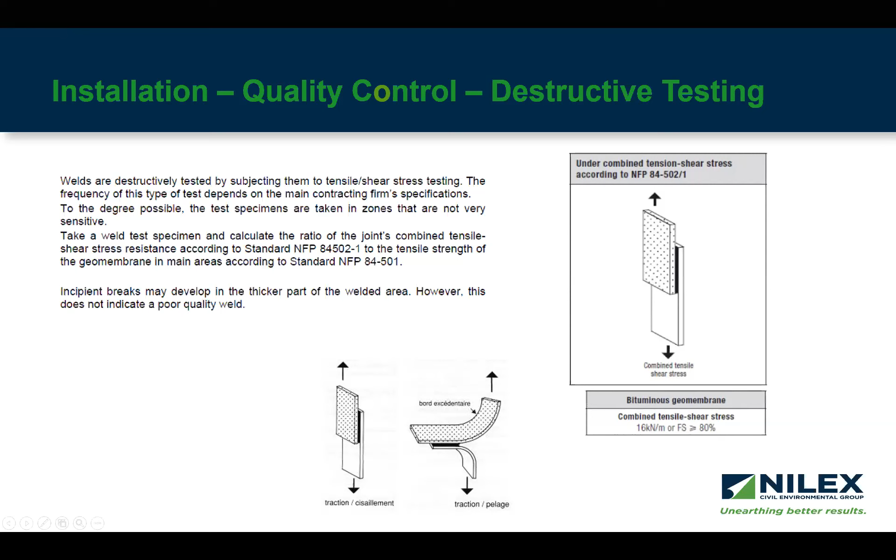TERANAP TP control, we are very excited about this test. We haven't had a chance to try it yet, but it provides another layer of assurance as it has an integrated seam control system that allows for seam testing. It was presented in the first part of this presentation, but it's really a great thing to have in BGM. Thank you very much everyone, and I'll turn it back to Trevor and Tammy for questions.

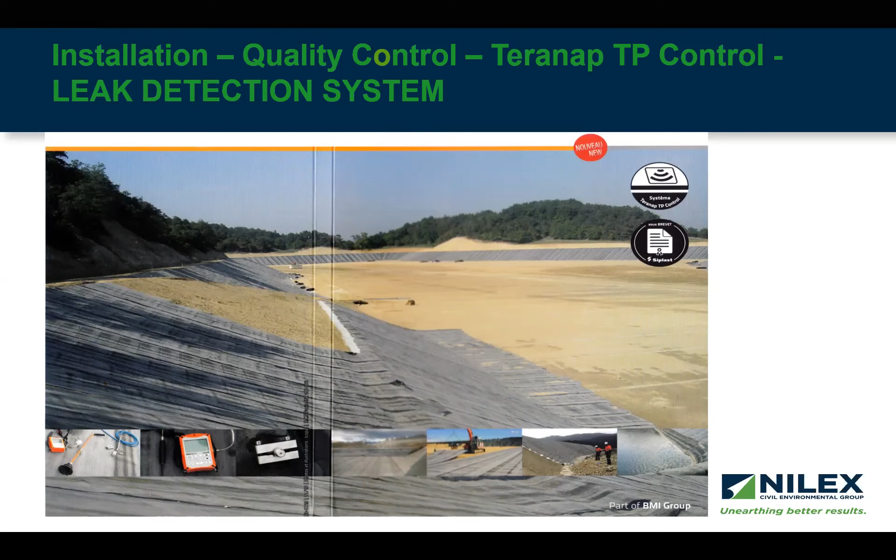Frederick, do you want to answer that one, please? Well, you mean about the patch, about the repair? It says, how do you do a test at the end of the roll, cuts and patches with the leak seam control? Not with the patches, you cannot. The TERANAP control is done with the overlap, just on the length of it. When you patch it, you can't. When it's for a patch, if I understood well, you can't do the seam. The seam, the control channel, is prepared in the factory. It comes with the channel integrated.

Okay, thank you. Next one: it looks like there's a different overlap for mining versus construction, can you speak to that? Well, normally it's 20 centimeters when it's for mining or a hydraulic job, when it's 4 meters width. When it's for example tanking, you don't need that much, you just need 15 centimeters for tanking. Normally we produce it in 2 meters, but also in 1 meter. It's a good question, because I think this is something we have to improve. Why do we really need 20 centimeters? It's an old question, and now, thanks to you, Nilex, we are working on a new way of welding it, and maybe we can improve it and have less waste too.

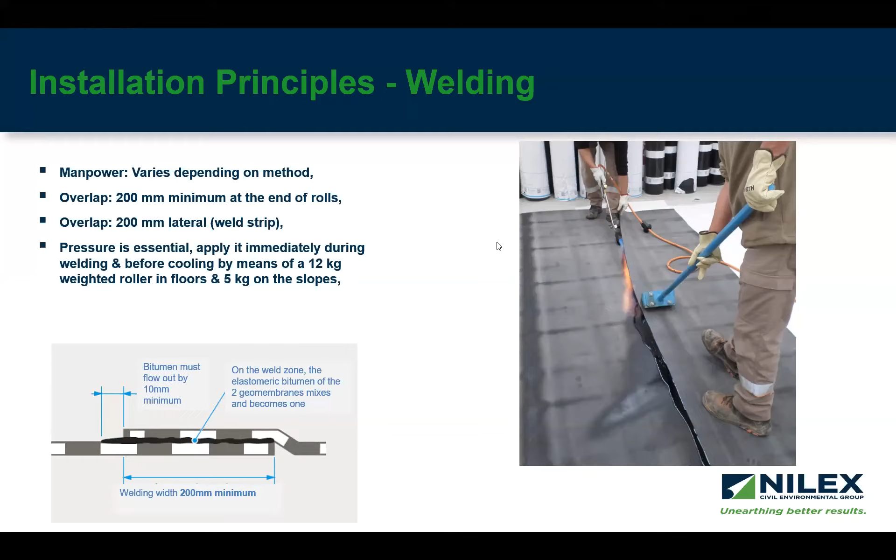Okay, thank you. The next one is, I believe one of your slides shows the angle of repose of 34 degrees. Frederick, this was from your presentation, is that standard, or does it only apply for specialized surfacing? Well, it's kind of a summary of it, but we did tests some years ago with different kinds of supports, with gravels and concrete, and it's never the same. Also it's not the same if you do it from one side, like the film part of it, or the sand surface of it.

And then how does the material have to be received and stored? What impacts are there on the product from temperature, precipitation, UV, or light? Well, UV, there is no problem. Temperature, in all the jobs that we did, we never had any problems about that. As I tried to demonstrate, obviously when UV has an impact on the aging of it, if it's undercover, it's not obviously affected, the material is less affected if it's not in contact with the UV.